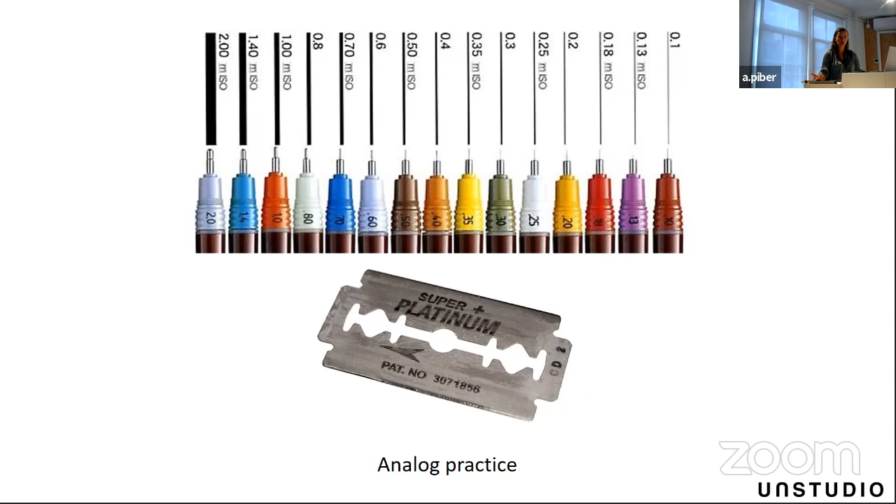Because when I studied in Vienna, and when I came to the office in early '98, we just made the shift from an analog practice with the Rotrings and with scratching to a digital studio. And this marked a shift in the technology of design and the making of the design. And it had significant impact on how we would go for the design.

And when I was a student in Vienna, this was one of the most read books. It was published in 1994 by Ben van Berkel and Caroline, the founders of UNStudio.

And I want to read part of the preface to you. Be aware, it is 24 years old. In our electronic age, which has replaced mechanistic and technological thinking, the old architectural definitions have lost much relevance. Even the building processes themselves are changing, making it necessary to look afresh at the potential meanings of architecture.

I was fascinated by this thought that it can change and architecture can upgrade. I listened to a lecture of Ben van Berkel about the Erasmus Bridge and the Möbius house, back in 96 or 97. I thought, yeah, this really triggers me, and I'm really interested in learning how that evolves. And the funny thing today, 24 years later, is that there's still truth in this statement, and it will probably even be true in 50 years from now.

It's how you adapt the parameters and how you adapt the tools on the way, and how you react to the problems of the world. That's what makes the difference.

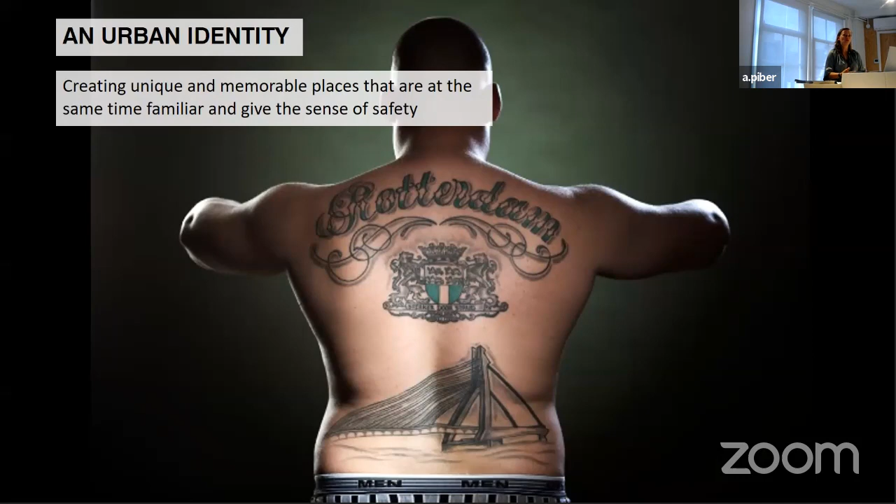And for us as architects, like, don't laugh, but it's cool to have a sailor that tattoos our project on his back, because it's how he identifies with his hometown, and it's a symbol that has meaning for people. I think this is sort of an emphasis that whatever we do, it is for people and it needs to be meaningful in one way or another.

The Erasmus Bridge was also done on this computer, where probably all the AutoCAD 3D forms were drawn. It was one of the first computers from Van Berkel & Bos at the time, in 94, and it had a gigantic impact, allowing us to work with the shipbuilding method and to analyze the geometry. This was then in AutoCAD.

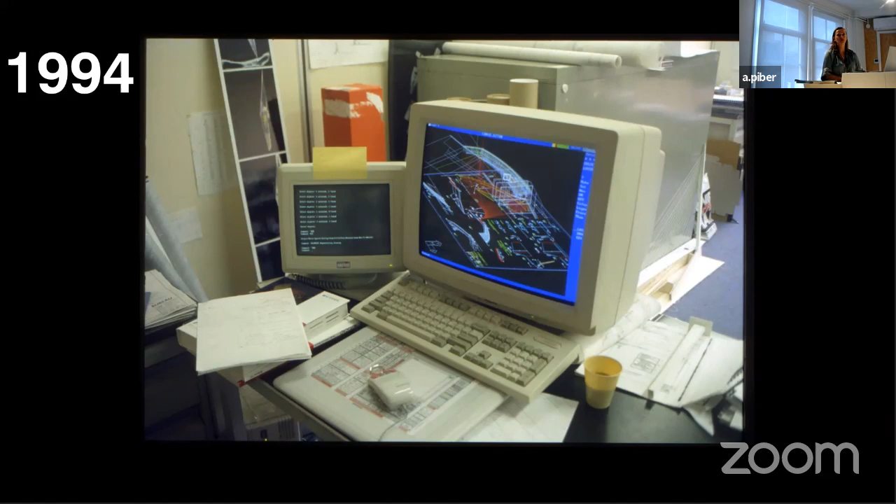Three years later, I think we worked on the computer model for Arnhem with the twisted columns, the twisted roof, and we switched a little bit later to SGI, to Alias and Maya, and started adopting these technologies during the design process.

To be honest, I think we were so much involved with the technologies of the design, and that was also a little bit the 90s, that all over the world architects started experimenting with the tools and learning the tools, that maybe the thinking about the making of it, like how you would then produce it, wasn't that relevant at the moment.

That was something that we would figure out later on. I think that's where this notion, in the end of the 90s, early 2000s, of parametric design developed. UNStudio has always been quite active in that field, looking at the parameters, adapting new software, defining new scripts, and today we work with BIM 360 and all those things. We've learned in 20 years all this digital fluency.

A few years ago we published a book called Knowledge Matters, and it describes 11 tools. One of these tools is the parametric, but other tools relate more to organization, sustainability, and materials. But they are all there to help upgrade a performative response of the design that we are doing.

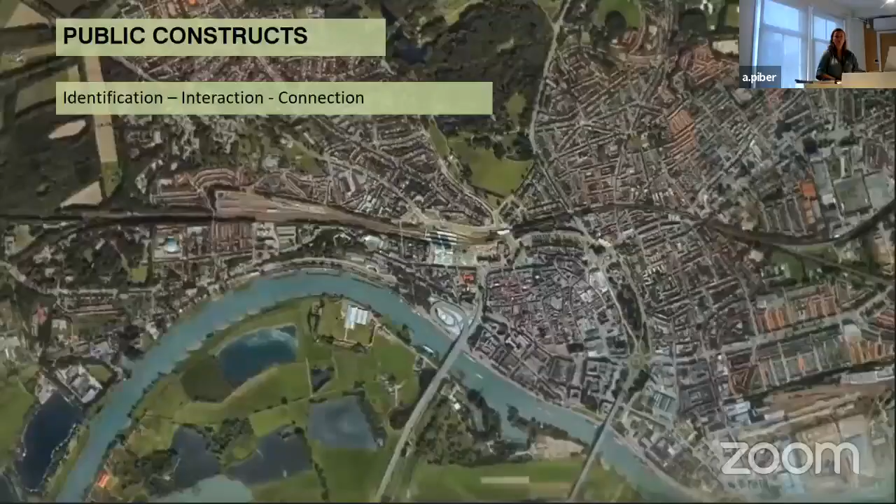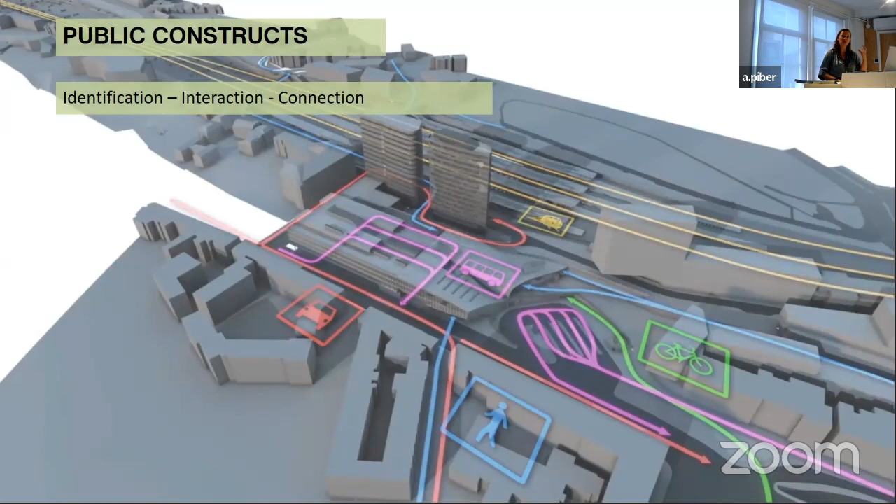In this book, some of the tools that we developed on the project of Arnhem are also described. It has been a project I started working on. It was very active for 20 years in our office and influenced how we work on many other projects of this type. So I will quickly show you to give a feeling for the thoughts behind these tools we are talking about.

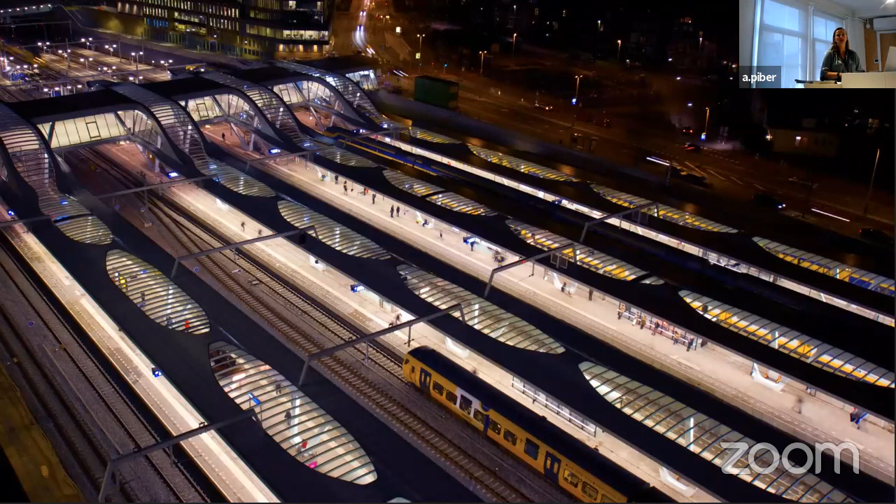This whole master plan was developed as an upgrade on rail technology, basically a high-speed train connecting the Ruhrgebiet in Germany with the Randstad in the Netherlands. This was one of the first stations, and it was more than a station — it was really a transfer location. We also worked on the platform roofs and the connection across the station, linking the northern part of the city of Arnhem with the southern part.

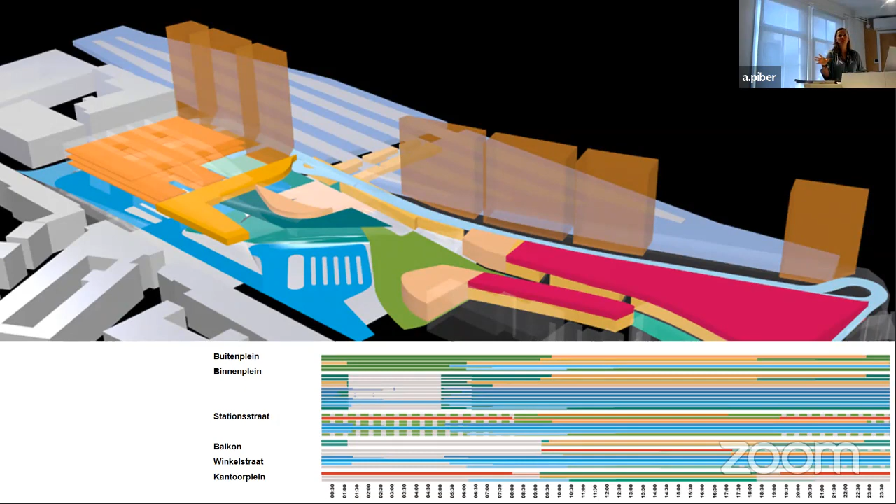This is then basically translated into a 24-hour diagram — which program and which plaza is active at what time, how we arrange the retail program, where the housing is, where the office is, and how all parts of the project work together.

What organized, for example, the stacking of different programs — car parking on the bottom, the bus deck in the middle, and offices on top — were these V-walls, which combined the different optimized grids but also created daylight, ventilation, and escape routes in the different parking spots. As a junior, this was actually the model I was literally building.

It's a cardboard model, one of the first models that we worked on. And it was very exciting to see this come alive.

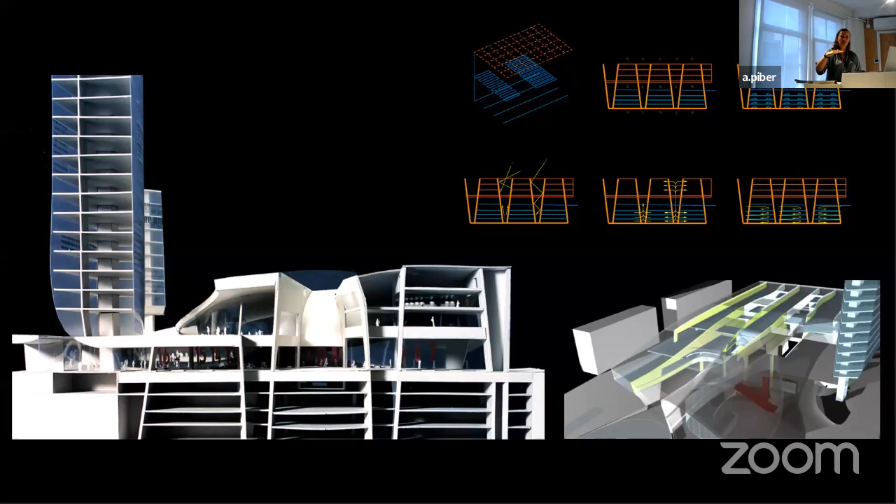And in reality, it was also a little bit like that, because the car park was completed, afterwards the bus deck, and it came all together in pieces.

And here you see the car park that is column free, because we are using these V-walls. You see how that spatially works and how it connects to the bus level. And at all times, all these things were under operation.

And for example, even when we look at the platform roofs, they came quite at the end, but they were really connecting to wayfinding. They were connecting to furniture elements that we designed as well to create a more pleasant passenger experience.

And the whole project was completed with the last part of the station hall only in 2015.

So it was a process that lasted 20 years, but brought lots of knowledge to our office, lots of knowledge in regards to mixed use, analyzing user flows, but also of adapting during the process of design and construction, the strategies, and still keeping true to the example.

And I wanted to show it as a short intro because it best reflects how we think about inner city densification, how we think of integrating technology with architecture, because also how the roof is made, how the columns are made. This is all innovative technology integrated with a straightforward plan.

And that brings me to the topic of future-proofing cities. If we talk about that today, and if we think about that today, then we also realize that we are facing quite some serious new challenges.

And those are connected to climate change, but they are also connected to technology and transport, movement of goods and people, but they are also connected to how we produce energy, how we use it, where do we produce food. And lately we also have, of course, found out that through social distancing, I think public health is something that comes more and more on the agenda of our cities.

And the question is, for example, if we design for cities, each city has their own challenges and their own politics, their own rules. But if you start designing cities with a human-centric approach, that's maybe the only way to address future needs, and maybe not design it throughout, but create that flexibility and that adaptability of a city.

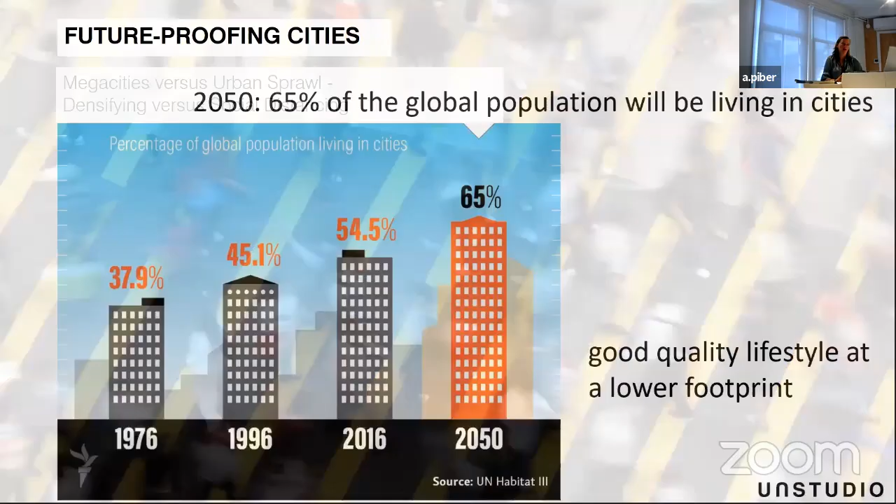Why do we talk about this densification? Because it's really an important topic. Before the pandemic, the forecasts were really significant that by 2050, 65% of the total global population would be living in cities.

There would be a large growth of Asian cities and movement to bigger cities. And that's logical, because it was always about good quality, better jobs, and basically also good because with a lower footprint, it could be more economic.

The question is if we will face also the outward movement again because of segregation and distancing, and people enjoying landscape and nature much more.

There's a sort of contradiction. There will be more people, we will produce more CO2, we will consume more energy and emissions, but we will also have to deal with the fact of how we are creating a healthy environment, not on the global scale, but actually in a finer grain.

I think there are discussions about the 20-minute city, discussions about how we can design the urban habitat on a human scale in a way that offers all these benefits, and how we combine the global benefits with the local benefits.

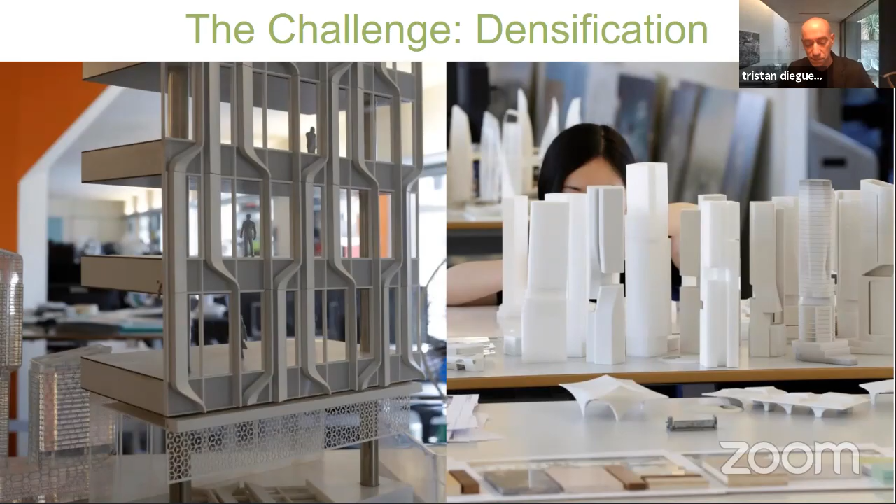The first possible answer to overcome this densification, or streamline the densification, is designing for multimodal experiences or transport hubs.

Arnhem has been a key example for us, because the whole study of user flows was really about creating a seamless landscape where you could walk and access the activity. It was really about the finer grain, going from one key moment in the journey to the next.

If you look at a much bigger project, it was the whole Qatar Railway project in Doha, where we designed all the stations for the 4 new metro lines. It was on a much bigger scale, but we also broke it down to the finer grain and created a systemic approach to a new metro network, and how that could basically upgrade and connect this city in a new way.

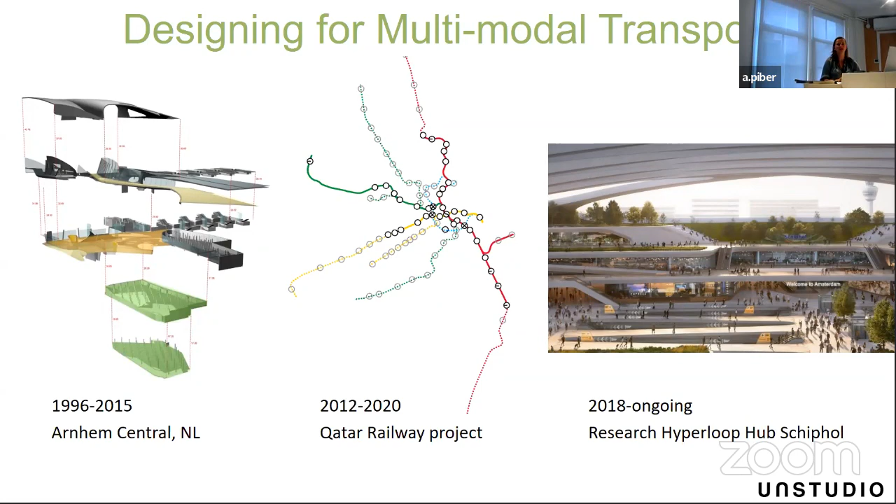A very interesting study that's currently ongoing is for Hyperloop, creating a hub at Schiphol, looking at the different modes of transport that come together there, and how those could balance and optimize the movements. And looking also at what could be the additional program, how the city of Schiphol could develop the airport city, and how the future could look like.

If I just quickly go through the Qatar Rail project, I think it has been about identity - the identity of the network as a whole, the identity of each of the metro lines, but also the identity of each of the stations.

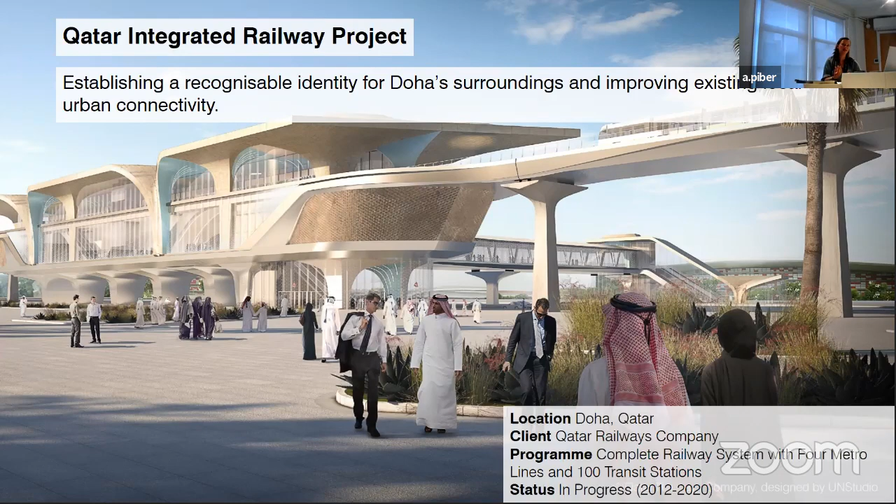So it's not a system that's repetitive, but it's custom designed for every station. There's a unique solution, but there's a formal language, and we like to call it brand guidelines, that really connect the reading of these stations with each other, which comes from these vaulted roofs.

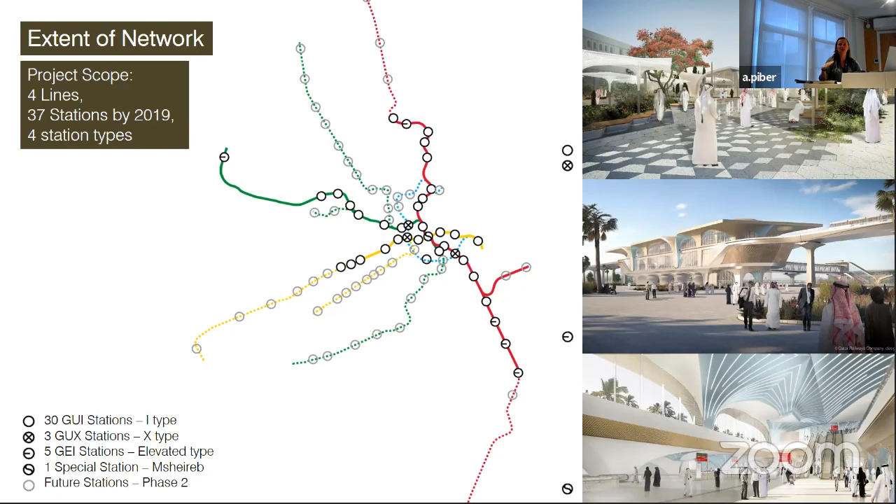There are stations that are below ground, there are above ground stations, and there are of course the intersecting stations that have been a bit more complex. But we broke it down basically to the smaller elements, like the vaulted ceilings, but also the panelization of the walls, the escalator - smaller ingredients that we would group depending on the scale and the identity, and create individual stations.

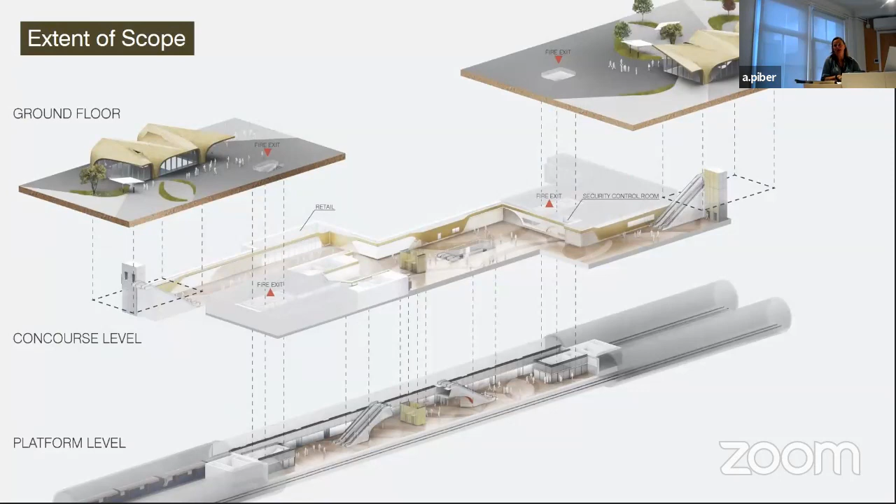It's like a family of stations in a way, with children that follow the same genes but are slightly different, adjusted to the needs at each station. This was important because those metro lines have been built by different contractors, and it was equally important to develop a material library and product library accessible to all these contracting parties.

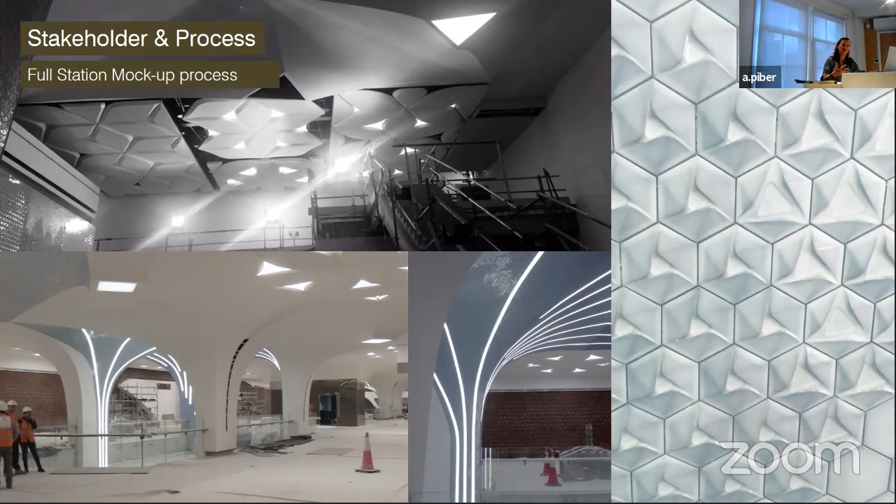So these were the mock-ups that were done in Doha prior to starting building, to really compare the quality of the different lighting fixtures, of the tiles, and create a standard that's basically carried throughout the whole project.

The important thing there is also that some of the stations are really in Doha, in the inner city, connecting to the education city, to the cultural venues, but some other stations are connected to new master plans and to new expansions of the city. So they're setting the infrastructure and the technology for the further development of the city.

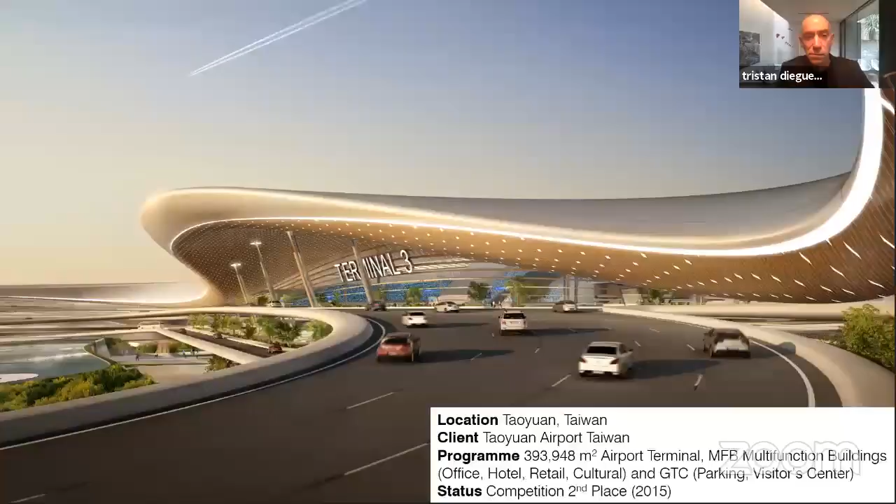One of the airport cities that we worked on was the Taiwan airport, the new Terminal 3, where we worked from the master planning to the design stage. It was a competition, quite a heavy tender, and it really integrated the existing Terminals 1 and 2, but also the idea was to create a real new experience that becomes a new hub.

It's also an experience of Taiwan, representing the identity of Taiwan and bringing this locality back into the project. When we started, our idea was how can we create a flexible space, since these mega hubs tend to be huge open spaces, very repetitive, very much the same. How could we create microclimates within that airport and a new typology of a more passenger-centric experience?

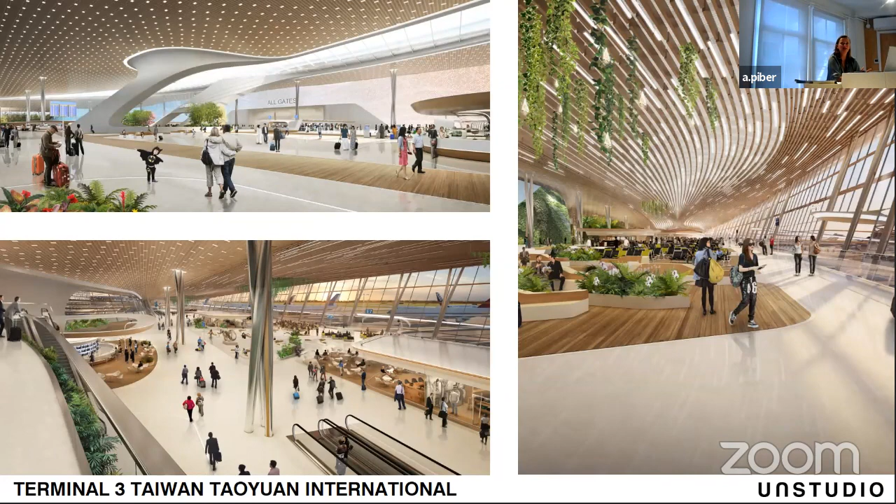I think we tried that by combining different natural elements and elements we know from the architecture and crafts in Taiwan, combined with the logistics and, for example, wayfinding through daylight in the ceilings, but also visual clarity in what you see outside, so that you basically can experience the departure.

When you go for departure, you also see how people arrive by taxi and start their journey, so you know where in the process you are as a passenger. And when you arrive, you have some daylight and a clear direction on how to enter the airport city.

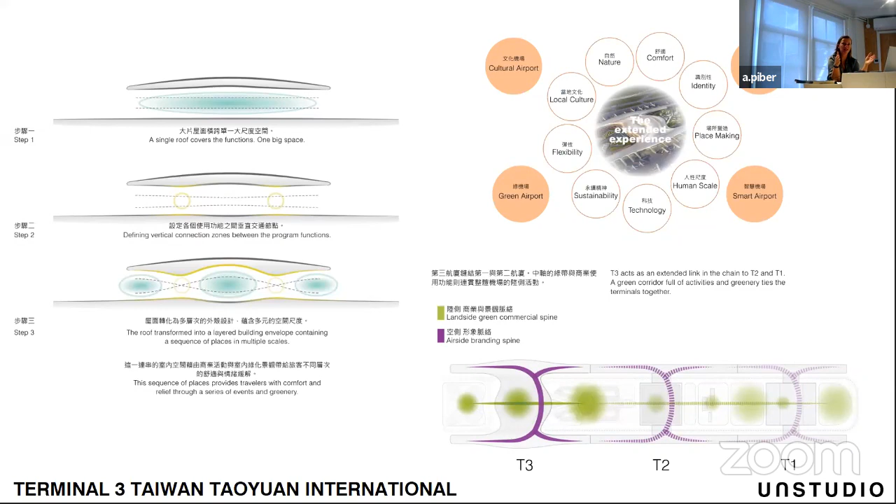This idea of the microclimates, and how a chain of airports connects Terminal 1, 2, and 3 with each other, creating a green spine on the land side with pockets, with gardens, and with program that supports the airport, has become this idea of an extended airport city experience that continues between land side and air side, with thresholds in the journey of the customer.

This idea of the microclimates, because it's something we find missing in some of the airports we travel through, was what we developed further.

How could you get the real climatic conditions of Taiwan to the inside, and create temperature differences and humidity differences depending on the time of year, but also depending on whether it's a place to wait or a place to proceed to the gate, creating differences in the zones of such a huge, vast airport, because it's above 300,000 square meters in program.

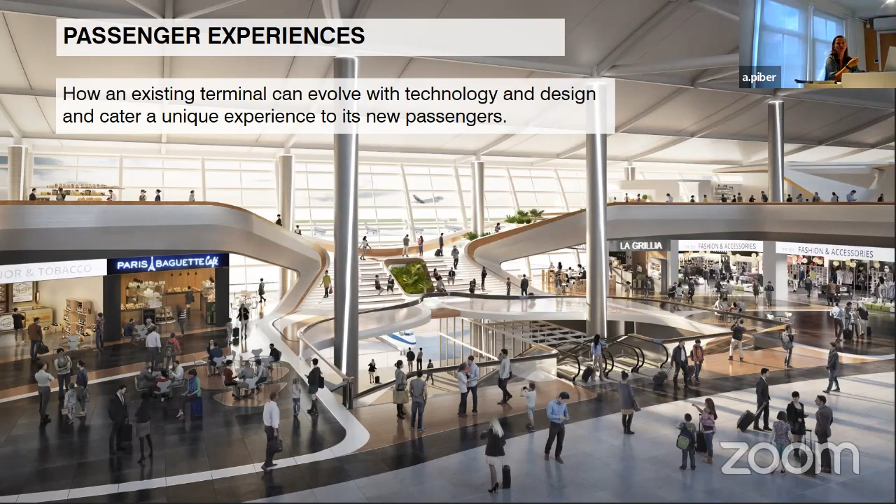We were not able to do this in Taiwan, unfortunately, but we were asked at Incheon Airport in Seoul to look at the cultural center, at the satellite terminal, and how that could really link and create a cultural identity of Korea in the airport.

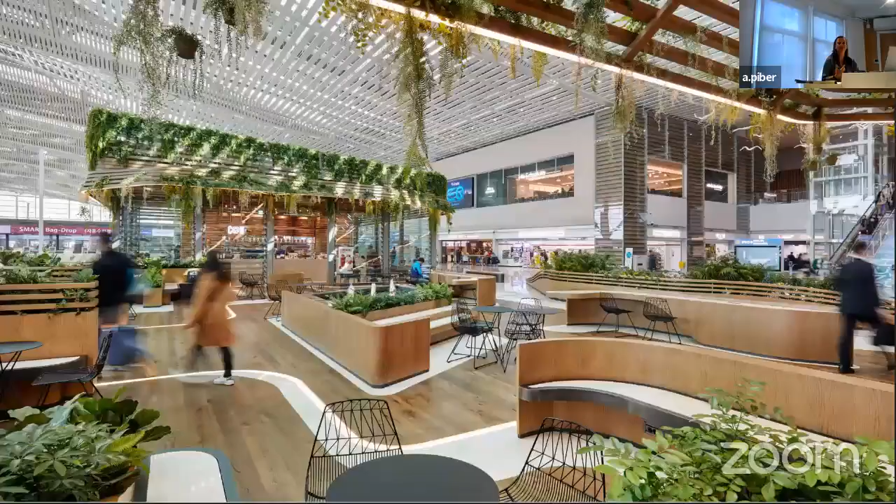One thing, the first small project that was realized, is a little meeting point—these pavilions, this coffee place, called the Landmark Area. It's in the new Terminal 2 in Incheon, one of these big, wide, open terminals, but it really anchors people to a place, linking it with the experience of real nature with wood and creating a real anchor point in the development.

That allowed us to look at a much smaller, product-interior scale, at what passengers need and how we can influence the journey. It also reflects a bit how we saw this idea of macroclimates and microclimates, that it's not all the same, but is really contributing to the relaxation, the recovery, the clear wayfinding, and the wellness of people in the transit mode.

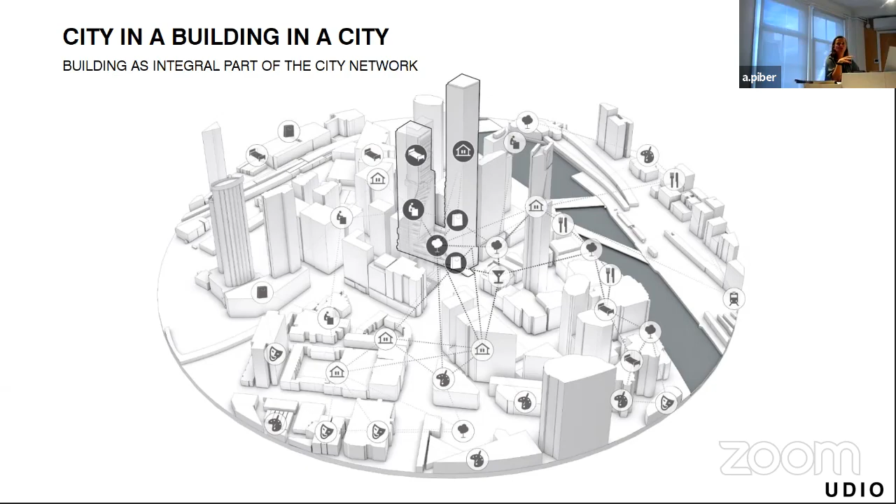Just to give you a glimpse on the one in Melbourne, that is really set on the South Bank. We would have been allowed to do one bigger tower, but we decided for two towers, because in that way we could create better places inside the floor plates, so better units, but also create a better integration with the surrounding and the scale of the surrounding, in terms of program but also in terms of routing and visual connectivity. So the driving design element of that project has been what we call the green spine.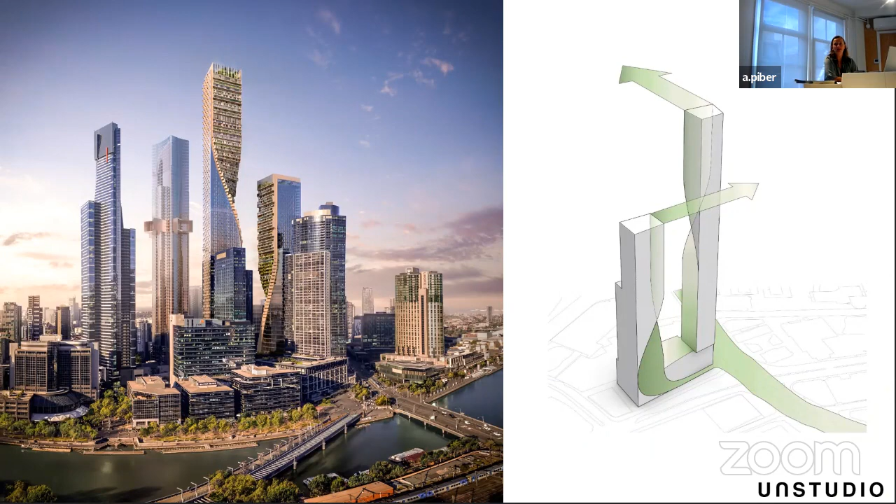So it's this idea of creating basically a connectivity with the ground floor green, with the public green, letting it step up to the public terraces, but also connecting it into the facades of the units, creating balconies, and also twisting the views of these units and creating high quality on the upper levels, impacting the skyline in a very elegant way. So how we looked at that was really the detailed

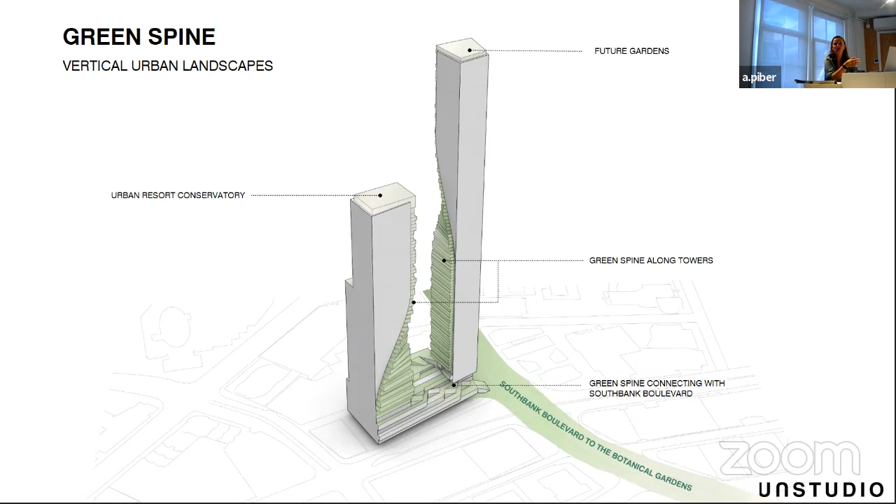Programming, like what could be the allocation of more public and shared programs, connected to lifestyle, connected to a sort of marketplace, but also always connecting exterior with interior. So this transition between what is a balcony, what is a terrace, and how does it relate to the indoor programming, was very important to create this vertical urban landscape.

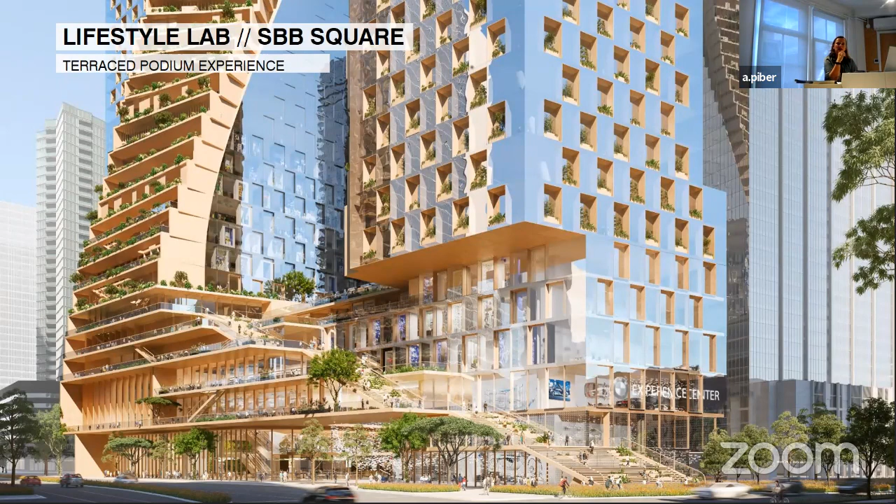And we created this terrace podium stepping up, creating an experience throughout. And by that, we're also able to use these as sustainable features in the project, to upgrade the program by having better offer to the users, but also by upgrading the building for future use.

And we called it elevated urban grounds, because that's also something that we see with this densification happening more and more: these podiums are getting several public levels. So there's not one ground floor street level, but we are seeing that the public comes into several levels and needs to be offered both areas to breathe, public areas, but then also segregated areas. That's one of the tools that, thinking about the segregation strategies we are facing right now, can be very helpful, because you could control the amount of people but have more public space for people in cities available.

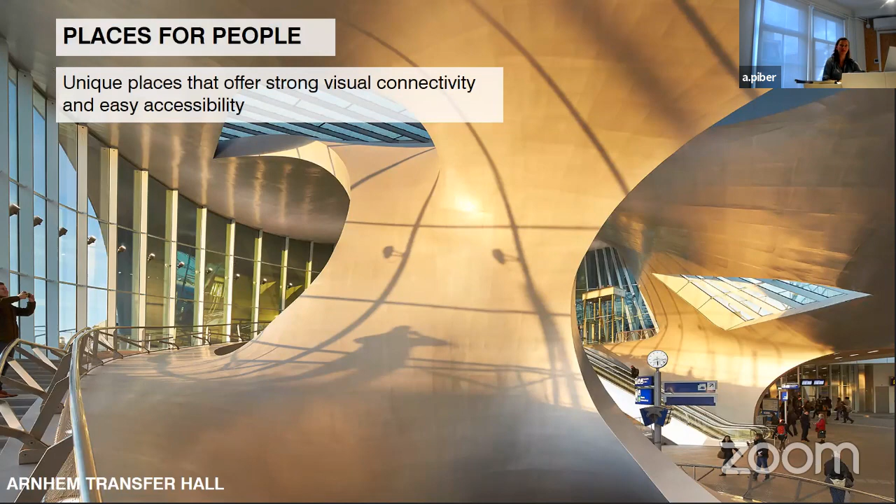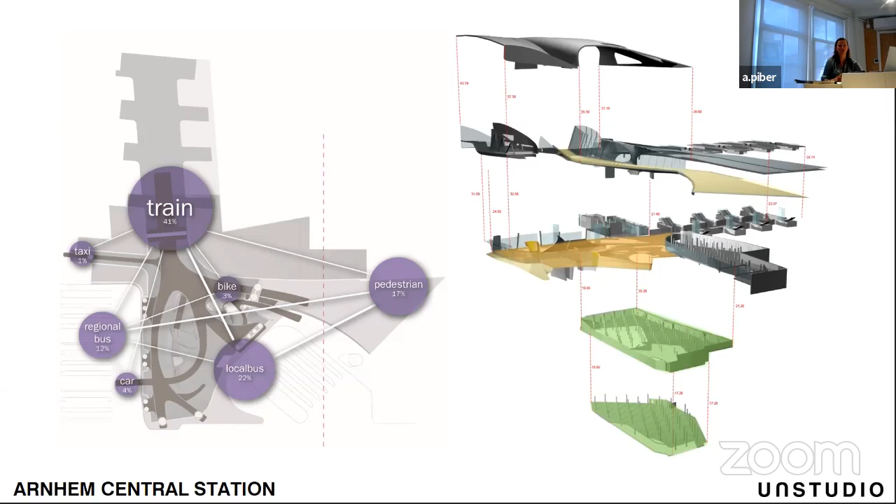If we look at the COVID issues, I think it's places for people that we need to create, and architecture is what can navigate people and create experiences, like in Arnhem. But it's important, or we think it's successful, when you can combine that with the right analytic studies. When I think how we were counting people in Arnhem transferring from one location to the other, we now have the technology in place to automatically measure that and use it to upgrade our environments on a constant basis.

So I think that's one of the future potentials we see when working with such an approach to public spaces, mixed areas, but also mobility hubs. The key learning from Arnhem is that we were able to connect parts of the city that weren't working that well, and the surrounding areas got a real upgrade. I think that's what densification in inner cities is also about—it's not about singular buildings, it's really about creating impact on the surroundings and creating densification of use.

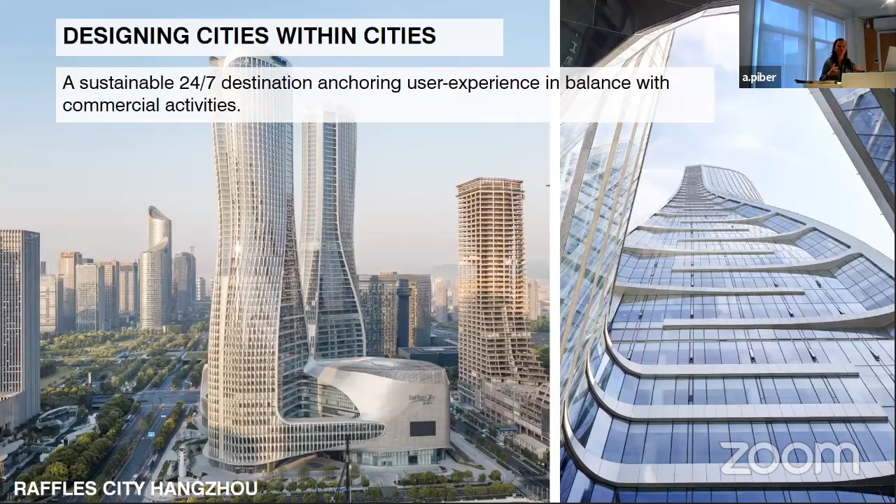From what we did in China with the Raffles City Hangzhou project, this was sort of the brief, because the project is set in a new town of Hangzhou. When we went for the first site visit, all the surrounding buildings were still under construction. The task was creating what they called a 24/7 destination that anchors the user experience, and of course it had to be commercially viable. The idea was that it becomes a city where you find everything within a block of 100 to 150 meters, but it also attracts people from outside.

Coming back to our methodology, we started with doodles of how users could potentially go into the two towers—we were also exploring should it be 3 or 4 towers, how tall should the buildings be, and how should it be positioned. These simple studies brought us to a very simple organization in the end, where we said the best optimized place to put the two towers would be on the diagonal opposite corners, because of the sun shading, and because the plot was so small that we had to put them in a way that you could still grow plants and trees on the ground floor, with sun reaching them.

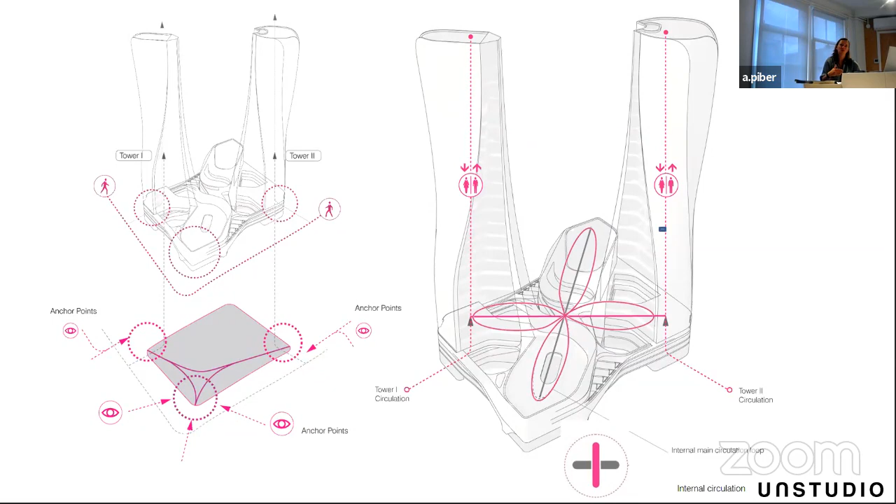That's why the podium has four huge courtyards that really create this connection between the podium and the towers. We linked the basement to the metro, and the commercial functions are basically put on the other diagonal, like the retail center.

This simple organization was basically coming from the fact that if you look at the Qiantang River and the lake from 250 meters, you have the best view in the upper 100 meters of the tower. To optimize this, it was also the reason why the towers are twisted—because the apartments on the top floors are organized to face south, like in China traditionally bedrooms and living rooms should all face southwards, and if there is a river to the south, that's even better.

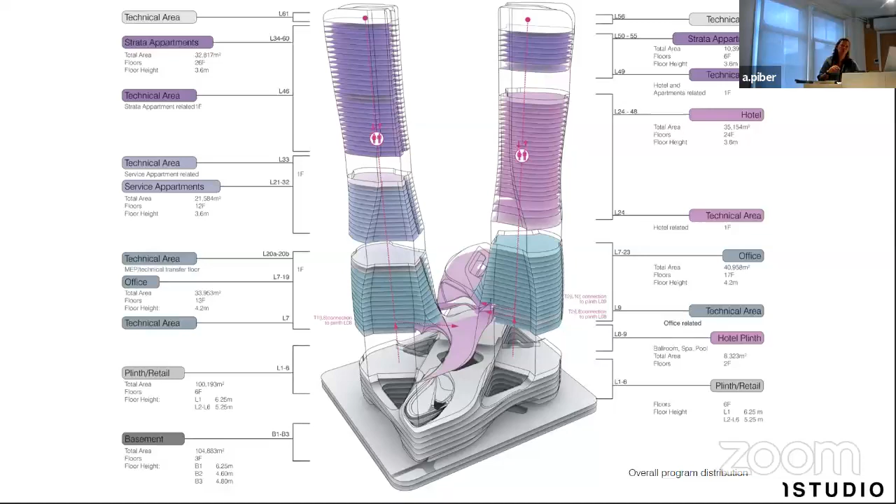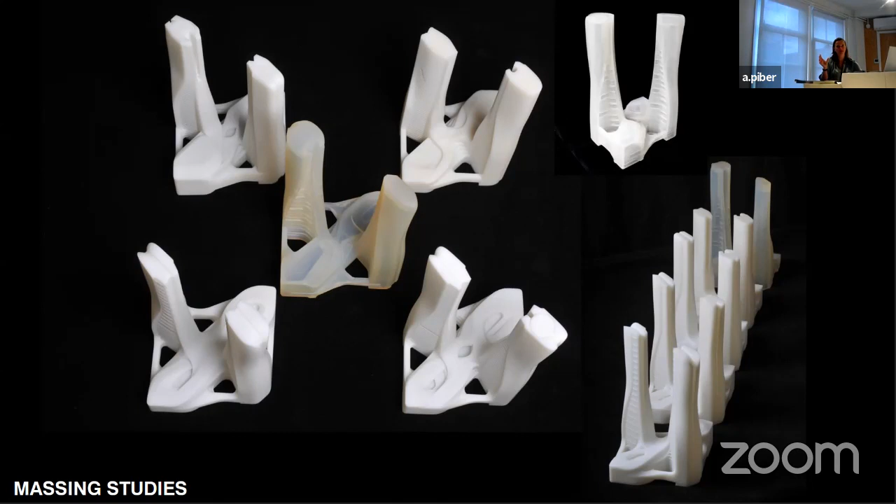The bottom section of the towers would house offices with huge floor plates of 2,100 square meters, and there would be a hotel and service apartment section in between the towers. For the form these towers got, I think we printed 100 of these models—these are just a few to see how it could be optimized. What was also driving it was the commercial plan, to really have the residences on top with only 3 apartments per floor, so 1,000 square meters of floor plate, and how that would link to the office floors below.

The diagonal shopping mall was key for us, this idea of not just having a podium and two towers, but having a podium so transparent that you can see the towers and also get daylight into the shopping mall. So we designed a central void space that spirals upwards, opening up views towards the towers, but also bringing in more daylight to the different levels of the mall.

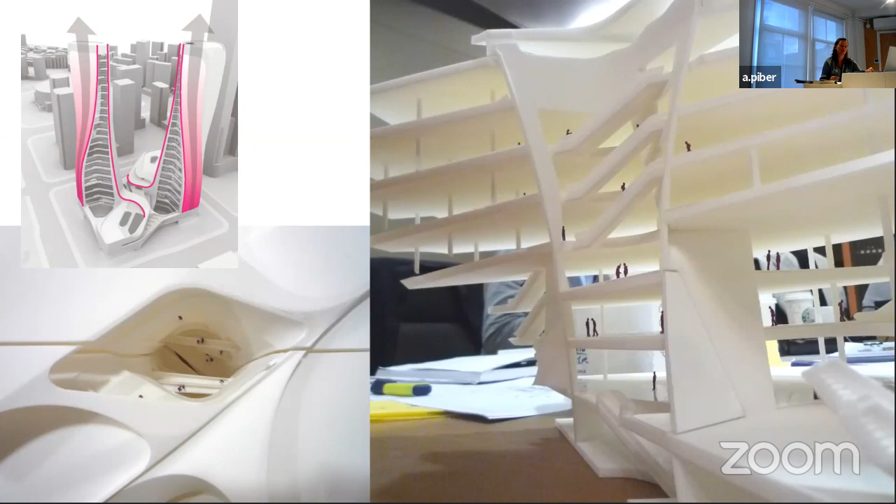This continuity was very important, also driven by a commercial idea. What you see guides you, makes it more attractive, and it's not just an aesthetic movement, but really an optimization of how your journey as a customer in that mall would look like. It's really daylight that guides people.

There are two long wings of the mall that end in what we call a diagonal void, which also brings daylight in. Each floor has a routing that follows a figure 8, so there's never a dead end, there's always continuity. And the idea, which has worked out very well in that mall, is that it's a combination of retail and F&B.

Should I stop a bit? Yeah, I will translate.

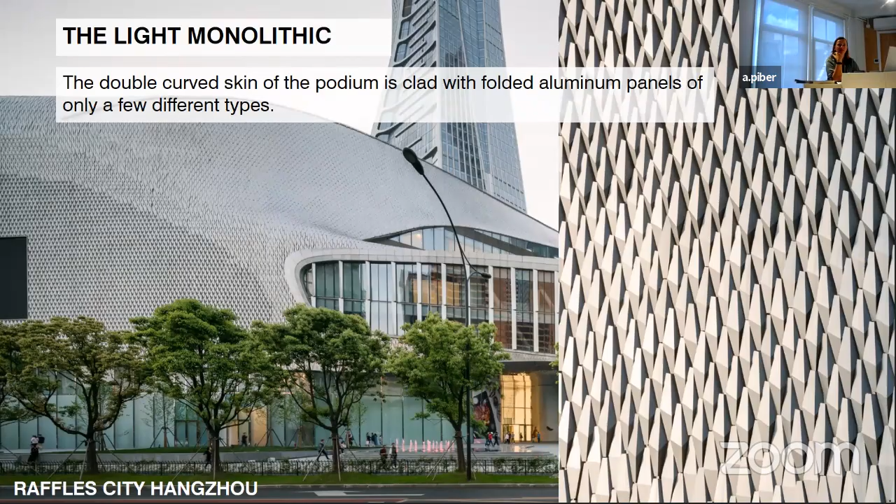But it was really the making of it, and the producing too, for example for the facades, everything digitally, creating the whole envelope and all the fins of the different facade types directly from the computer models.

We had to move and start our office in Shanghai in 2009. The project started in 2008, and we worked on this during the tender phase, basically for the facades, to see if we could optimize it, because there were different floor heights for office, hotel, and residential. As you can imagine, there is a different grid in the facade, and different needs for sun shading.

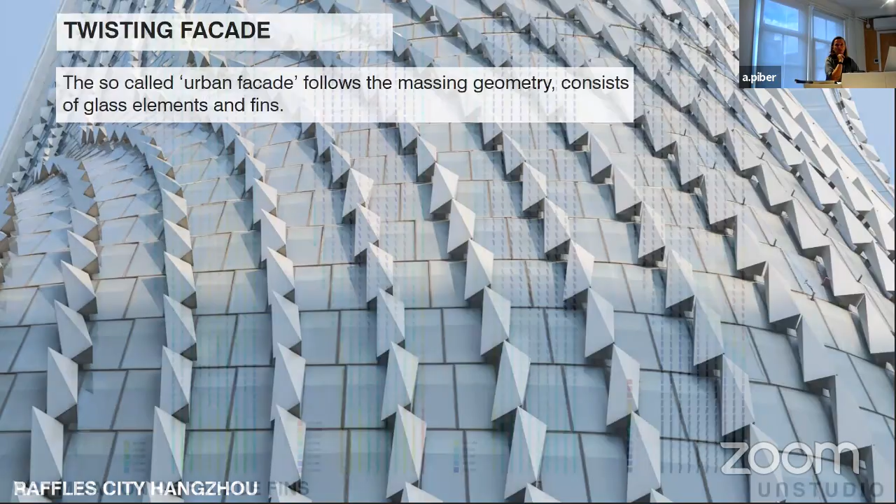So we optimized the glass elements. They are not curved, they are straight elements, but it's the array that creates the twist. The fins were completely optimized to create the best sun shading, keep out the heat from the towers, and reduce heat gain.

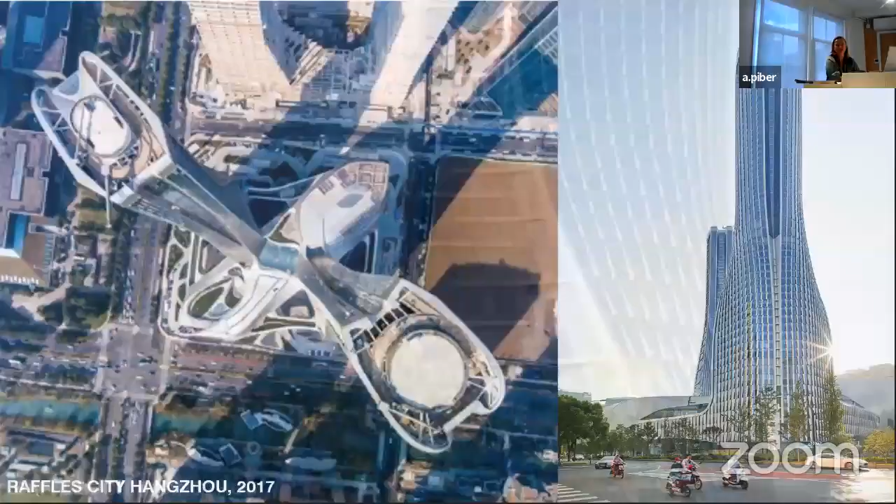So we looked at the repetition of those elements, how they could be optimized material-wise, and how they could emphasize the form of the tower. This is, I think, what for us is mastering the crafts. We were lucky to work with a client who wanted our supervision throughout, collaborating with the LDI from beginning to end, so we were really able to bring the concept to reality. It opened in 2017.

Here you see one of the drone pictures we have, but it's now housing the 5-star hotel, the offices, and different functions. This idea of having these courtyards, where the office tower starts and how it lands in the podium, has been key also for orientating the user in the project.

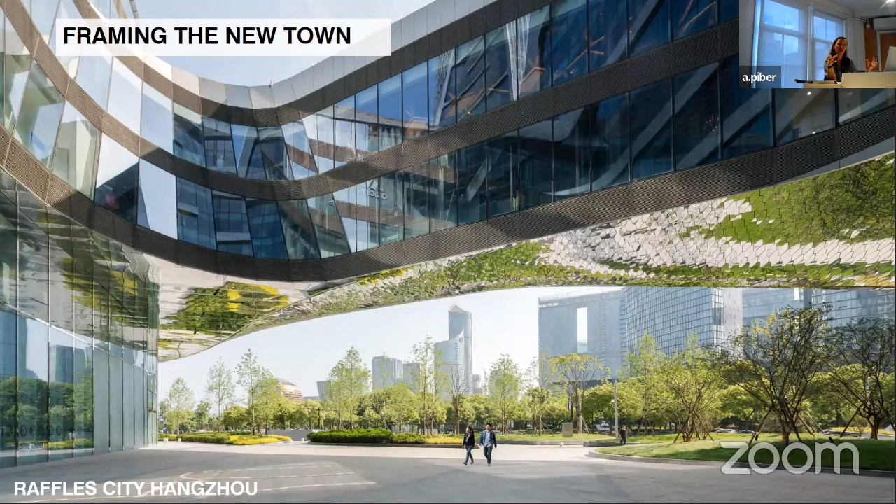Equally important has been this analytic approach to how we make it feasible, repetitive, and still stunning. Especially the entrance and the link to the first floor, but also to the basement level, as sort of three more public levels of the building, integrating staircases with seating and informal meeting spaces. Although you occupy the whole plot, you create these public spaces that bring people into the building, and they also frame the new city of Hangzhou in a very spectacular way.

It makes it an anchor point in that new area, and includes this framing of the new town, but it's also relating it to the human scale again. It creates smaller sequences of spaces that one can relate to, and go from one to the other, experiencing a chain of different events.

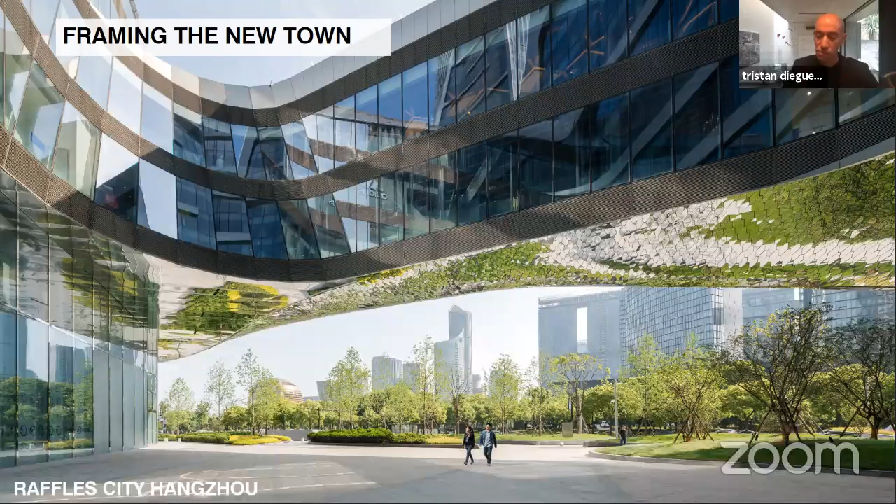That brings me to the third possible answer to densification, and it's maybe the most theoretical one, because it's quite new for all of us - this thought about designing for a circular economy, and looking at the cradle to cradle approach that was coined quite some time ago. Similar to innovations in digital computing, I think we have to learn the tools.

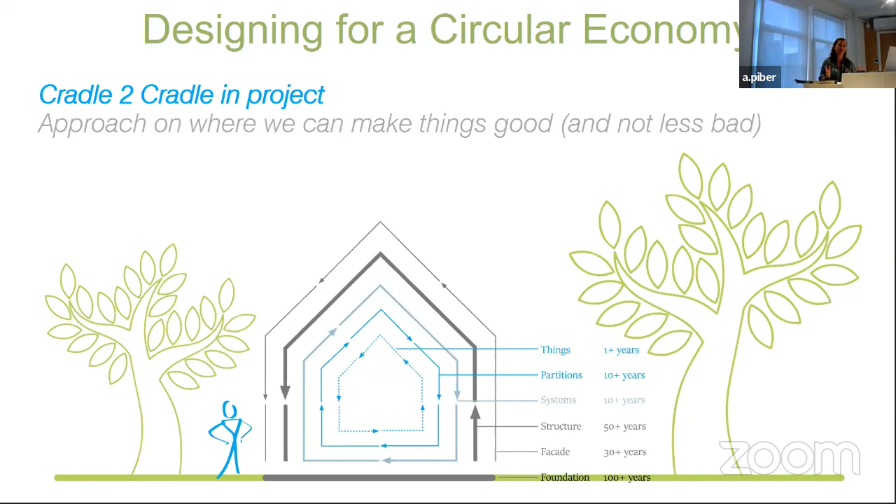One of the tools is to see our built environment with different layers, and there are different lifespans connected to those layers. In a sense, what we do in terms of cradle to cradle can have different implications on the urban scale.

We are working with a neighborhood, a city in the south of the Netherlands, on ideas for how to create this circular city, but it's also circularity in terms of creating, for example, this office tower in Amsterdam that can be converted to different use. It's designed now as office, but also designed to be converted to residential. The retrofit and the modularity of construction is an important part of the cradle to cradle philosophy as well.

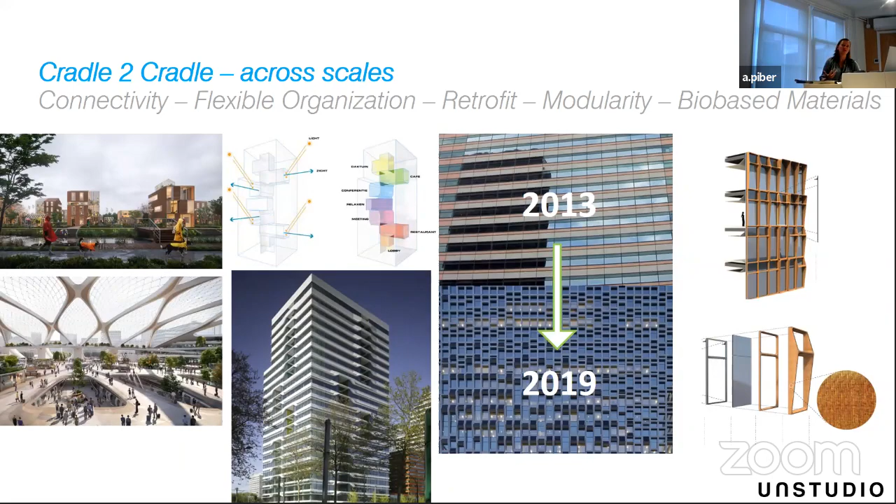And likewise, we engage also in real material research, where we look at bio-based materials and how to define new building elements from it. Those are European research projects that we do.

But I think for us in the studio, it's very important because they influence how we think about our projects, and that is basically also the essence of what circularity connects. It's holistic, connects ethical and strategical thinking, in systems. So the transcalar approach of UNStudio, working with small research projects from product design upwards to large mixed-use projects, is really learning in small prototypes and connecting it to bigger thoughts in architecture.

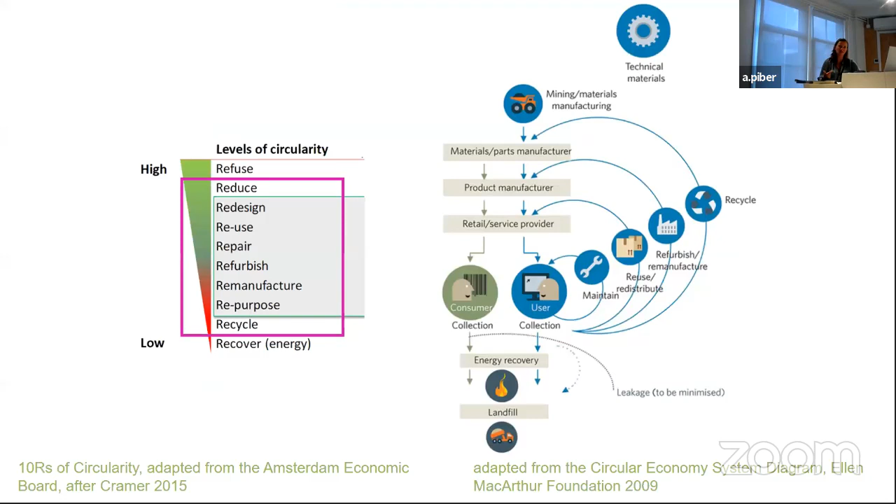But the idea of circularity is basically to change the process from a linear process to a circular process, where it's not about take, make, and dump, but that the materials stay in that loop, defined through these different levels. I think what we find interesting about this thought is that it impacts our thinking in all the different processes of architecture.

Because when you design, it means you have to think about the material life cycle of a project. So which components can be reused, which are easily produced, which are maybe renewable materials that can be used. So it's this thought that you could eventually disassemble a project and reuse the elements and not waste things.

And there's another aspect, because we come from the process part of things, which is that it impacts the socio-economic life cycle of a project. So it means you work on projects in a different way, with different partners and different contracts. One simple example is, you don't buy a lighting fixture and it's yours, but you lease it from a supplier that still owns it but upgrades it. These are ideas explored for more than just lighting fixtures, for elevators too. We all know that, but it's a different way of thinking, and also requires a different way of thinking in the design.

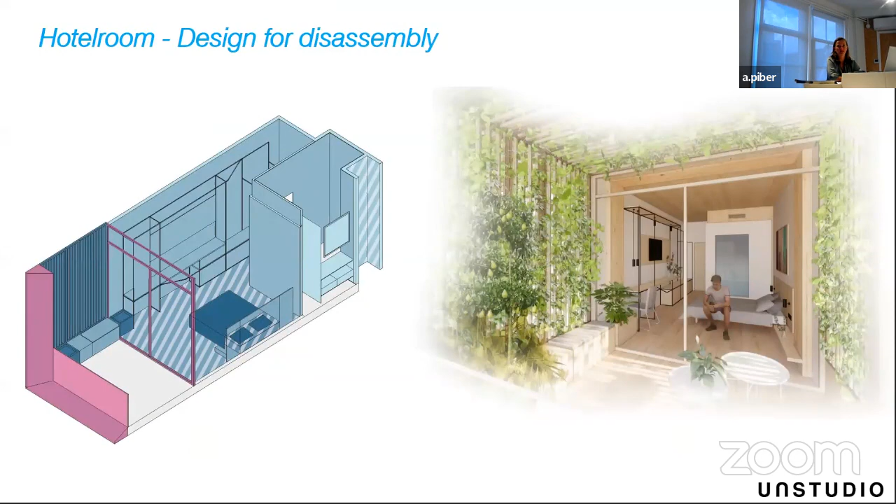A quick example, because it's easier to study this on smaller elements, is a hotel room that we designed with this method—thinking of all the elements in the hotel room and how long they would last, when would they need to be renovated and disassembled, or how you could take bigger elements that will be upgraded and create smaller elements to use for something else.

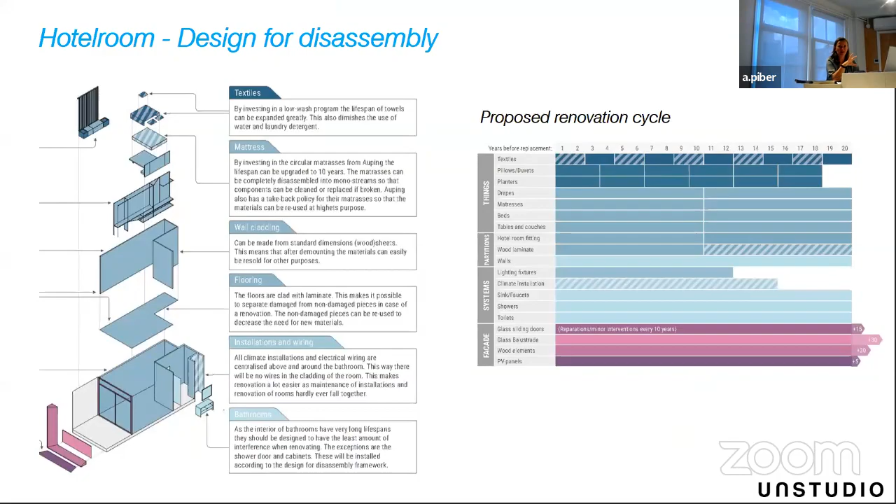I think we are only in the explorative phase of that, but we see that these new tools also create new requirements, for example for BIM, to really have the definition of all the materials and create this fluent combination from design to production, and what we learn from the materials and disassembly to really influence how we think in the design phase.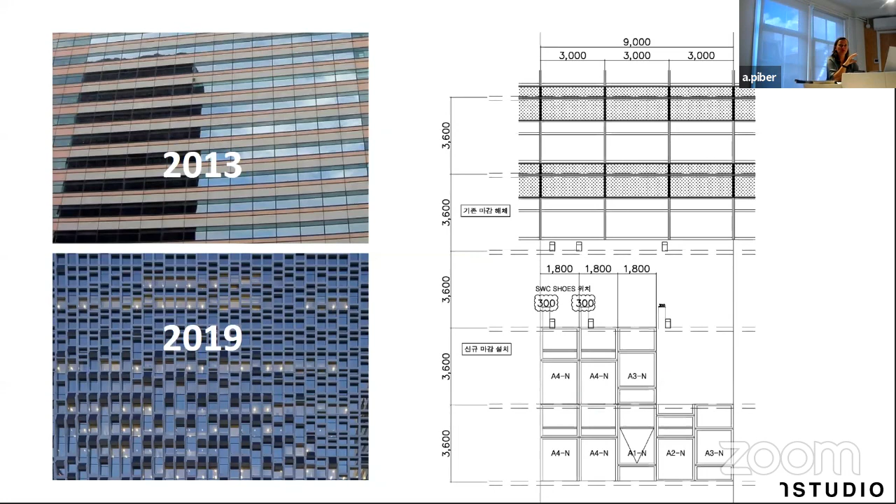So very pragmatically, we looked at the structural grids of the facade and how that could be changed from this horizontal striping facade to something more responsive to what's happening on the inside, and in a modular way.

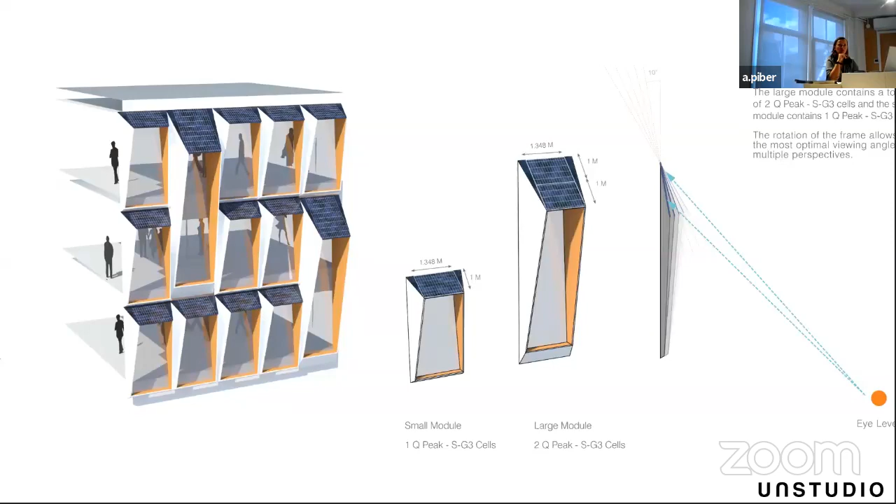We looked at elements that could span one or two floors and would integrate solar panels, either smaller or bigger modules, depending on the location in the building. We looked at the whole building skin—north, south, east and west facades—their exposure to sunlight and to the neighboring buildings, to find the optimum locations for placing PV cells, combining this with a modular systemic approach of different modules and sizes.

Also the depth of the modules between the north and south facade would be different, and the height would differ according to the program behind and the views as well, creating this field-like facade.

An interesting element of the construction was that Hanwha didn't necessarily want to move out of the building and wait for the renovation—instead, the whole building was renovated while it was in use.

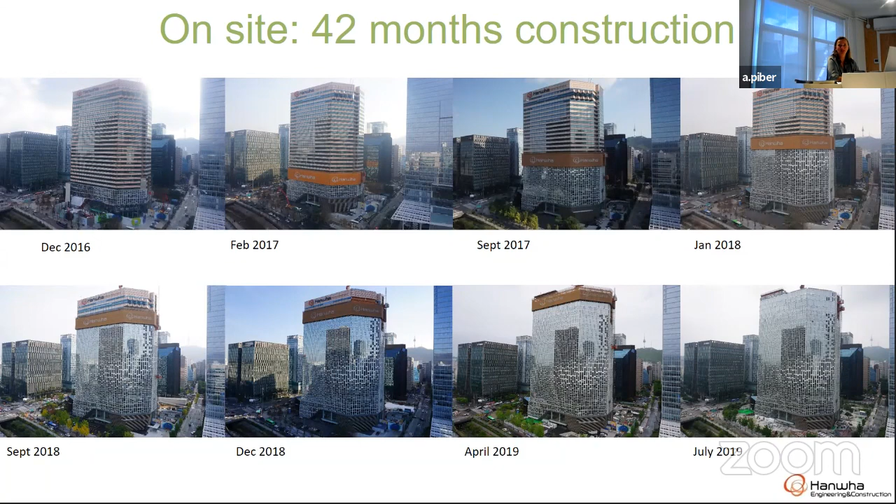Before the renovation, there were roughly 3,000 people working in the tower, and they would renovate three floors at a time from bottom up. This unfortunately took 42 months. The building was under construction, but you would see it progressing from bottom up.

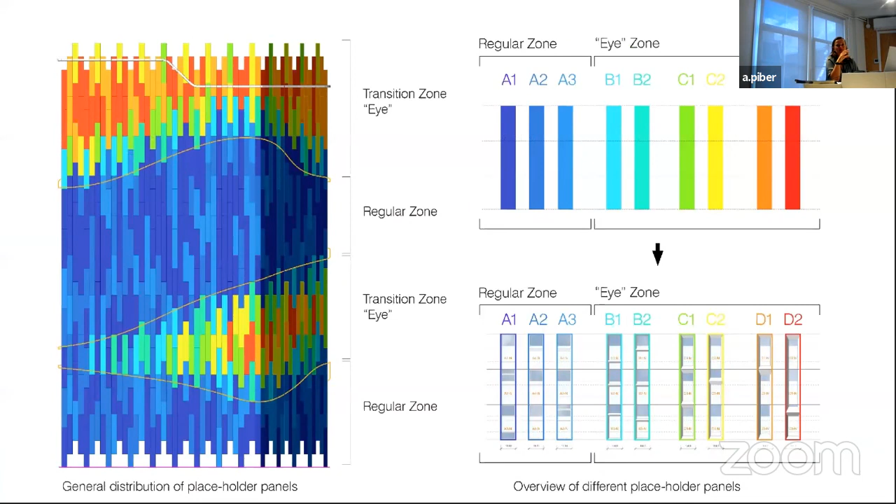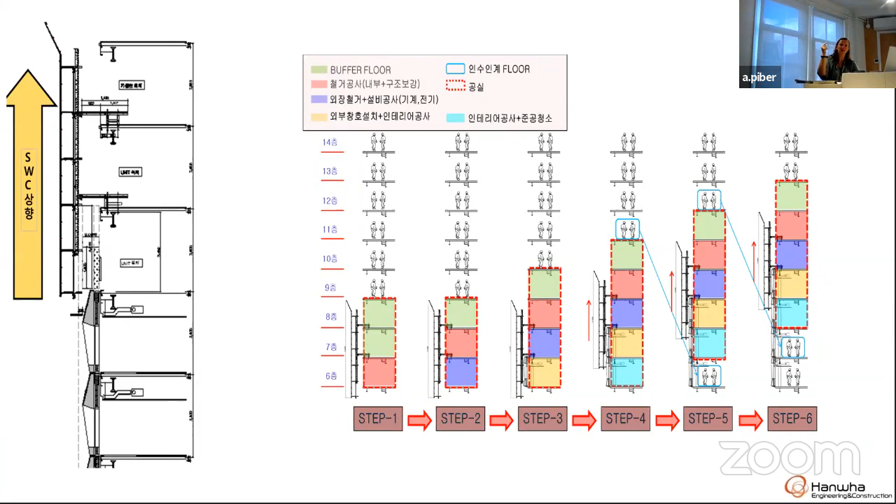The parametric design—the technology of designing these different modules and grouping them into families—also helped us with the logistic process of producing the right elements at the right time and putting them in the right place. This was in one of their factories, and this was the system of how it was brought to the site, since they were always storing the elements on one of the three floors and bringing them into position, moving the whole thing upwards.

I think that was quite an assembly of these elements—these show the north facade and south facades with their different depths.

I think for us, the philosophy of using one system with variation within that system to accommodate the climate response, and to accommodate that you can include PV cells into the facade, has been key.

It has become a real upgrade. It looks like a new building, and that's one of the potentials that may be important for densification in cities, because you're marginally creating more square meters, but you're creating better space. It also creates for the company in that case a new identity, and it allowed connecting the public square and this plaza, creating a better environment, not just indoor, but in how the building connects to the surrounding buildings.

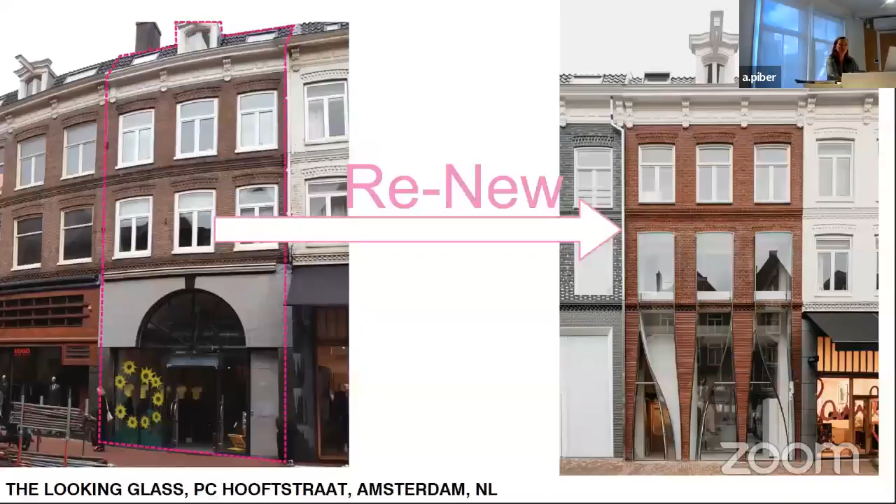I'm sorry, I was a bit over enthusiastic putting the slides together, but this is the last project, I promise. Oh no, go ahead. And it's a smaller scale.

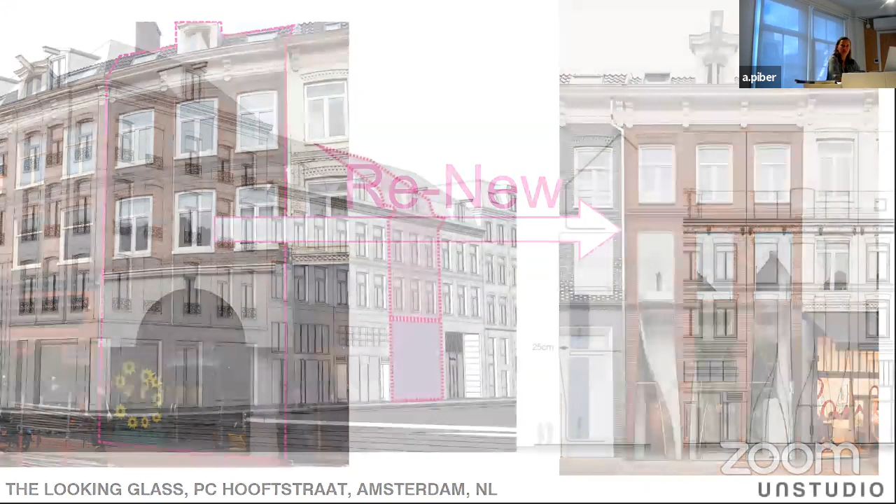It's in Amsterdam, in quite a well-known street for retail, where all the fancy shops are. We were asked to renovate or retrofit this existing building, and there are quite strict rules on how you have to treat those facades and buildings, how you have to segregate the plinth, the midsection and the roof, and follow the traditional rules.

I wanted to show it because it's a different level of craftsmanship. Like the project before, it was all about digital craftsmanship, creating the field, creating the modules, something repetitive. This is more about craftsmanship that is more linked to the materials.

Our idea was to create these extended show windows that follow the same fluidity as textiles in fashion, because this area is really where all the fashion brands are, but it's close to the museum district. So it has a notion of exposing the products, but also creating the right cultural framing for those.

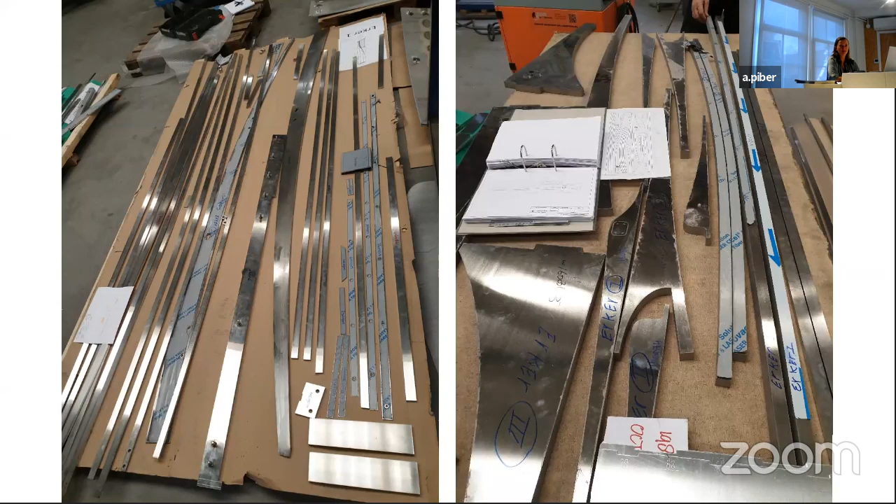It's twisted glass pieces held by a steel frame that was produced in elements and then assembled in the factory and brought to site and lifted into place. These frames were just there to hold it up during the assembly, and for bringing it to the site and lifting it into place, creating this contrast between the brick, the glass, and the steel framing.

If we talk about integrating technology, or using technology in architecture, it's also about where in the world we're working on such a project, because it's very much connected to the place, to the craftsmanship, and to the companies you work with, and how you can implement that. That's why I've been showing China, Qatar, Seoul, Amsterdam in a continuation, so you can see the topic of craftsmanship slightly altered depending on the location and the possible materials, but it's something that fascinates us.

If I look back to why I started as a young architect at UNStudio, this was much connected to the theories I learned in the early 90s, and to the quotes I mentioned in the beginning. For example, it is the same search for how we can contribute to architecture in a new way again and again and again.